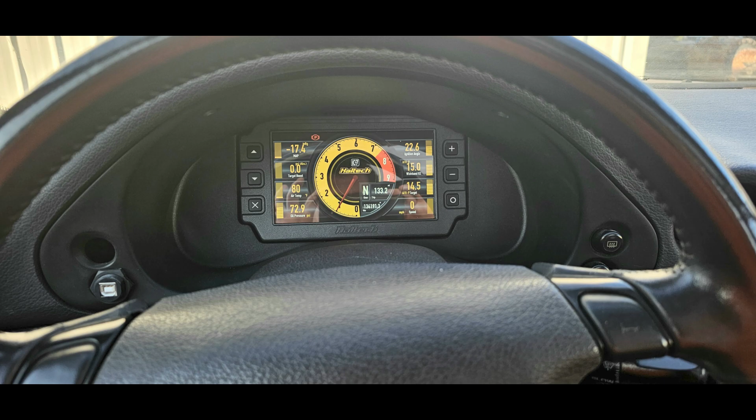So today we're going to talk about two of my favorite features in Haltech NSP. One of them is flex fuel tuning options, and the other is 3D maps. And we're going to see how we can use those together or separately to affect two different methods of running flex fuel in Haltech. So let's say you decide to make the move and you want to go to E85, but you also want at times to run pump 93, and you don't want to drain the tank between your ethanol and your pump 93 octane, right?

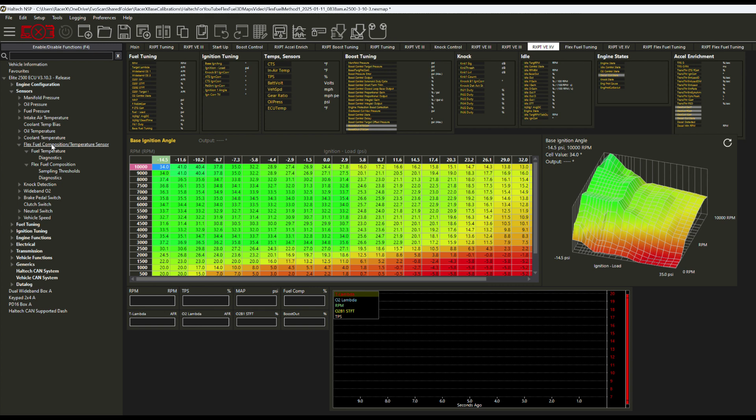So in which case this flex fuel sensor is going to allow you to put whatever you want to have in your gas tank and run on that, and your car will run just fine regardless of what you've got in there. So first thing you're going to do is go under sensors, if you installed your sensor, and find your flex fuel composition temperature sensor, and here you're going to configure it accordingly to whatever wiring you have set up for your sensor, where you've wired it into your Haltech.

So from there, got a couple more things to do. I'm not going to go into too much detail about all of the configuration for a flex fuel sensor, but you're going to want to come in under fuel temperature, under diagnostics, and enable both the temperature raw minimum and the temperature raw maximum. And then under flex fuel composition, you're going to set up your thresholds, right? So enabling your thresholds here, a maximum RPM threshold, a maximum load, and then same thing under your diagnostics, enable each of these. This is going to allow you to provide a little bit of a safety feature in case your flex fuel sensor decides to basically take a crap on you or something similar to that.

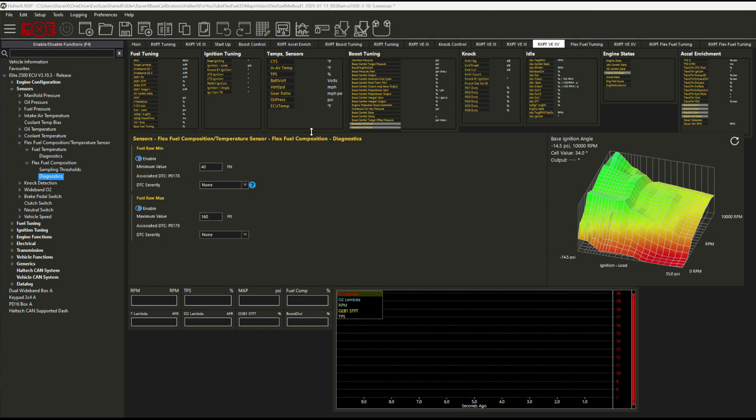In general, it's a good rule to put your flex fuel sensor on the feed line rather than the return line. But if you put it on the return line, then these options allow you to essentially put a clamp on things. So when you're in a high flow fuel rate scenario, what we'll do is keep the readings of the ethanol consistent. So you also have options to set up any DTC severity levels that you might want to, and act accordingly on those if you want to do something with that when it occurs.

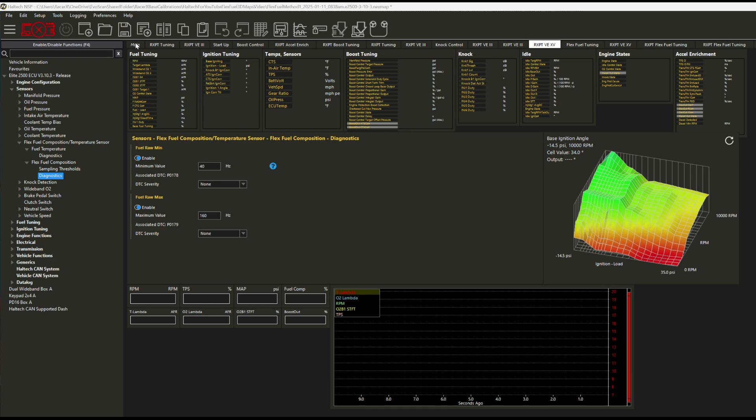So with the sensors set up, let's actually go over here to main, and we can close up the sensors tab. Now we go under fuel tuning. And here under fuel tuning, if you haven't already done so, you definitely want your tuning method to be volumetric efficiency. This is the magic that uses all the math that allows us to tune fuel pretty much one time and not have to tune it again. And generally, if you've got your injector scaling correct, and you've got your dead times correct, and you use a very standard volumetric efficiency fuel map, you're going to be in the ballpark right from the get-go. But anyway, that's a story for another day.

Under fuel type, now you can select flex fuel. Before you might have been on petrol, or you might have been just running ethanol with a specific ethanol percentage. But now you get to choose flex fuel as your option here. And when you do that, the beauty is that this is going to allow Haltech to do the math for lambda based on the stoichiometric ratio, and it's going to provide the proper fuel mass. So whatever percentage of ethanol is in the tank is going to determine the stoichiometric ratio.

Okay, and the last thing we're going to need to do, let's again close up sensors here. We have two corrections that we will need to enable now. So under fuel tuning, we've got our standard corrections here, and we want to add this one. If it's not already enabled, enable fuel compensation correction. And under ignition tuning as well, you've got corrections, and similarly here, you want to also enable fuel compensation correction. This is going to allow us to use that ethanol sensor to make some changes to our fuel and to our ignition based on the ethanol content.

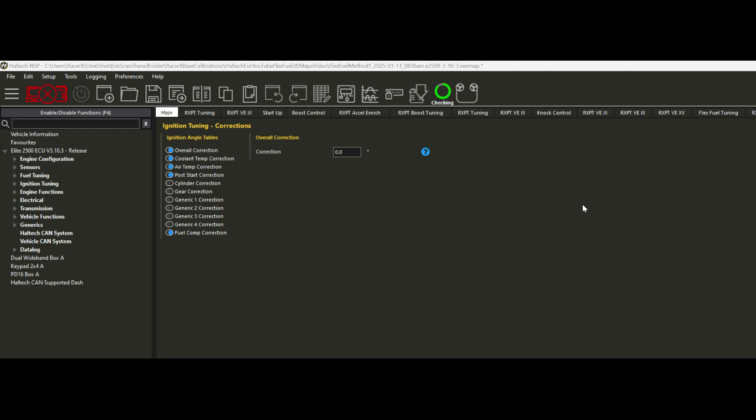So one of the things I just genuinely love about Haltech is its extreme flexibility. So right now we're going to talk about two different methods of tuning flex fuel that you can use in Haltech.

So with the first method, generally the rule of thumb is first you do all of your fuel tuning for your petrol. So you put in your pump 93 octane or whatever have you, and you go about setting up your target lambdas, and you do your base fuel map, which is your VE map. It should be somewhat similar to this. Go and do your fuel tuning, go and do your ignition tuning, go do your boost tuning, do all those things, and then you are done with petrol.

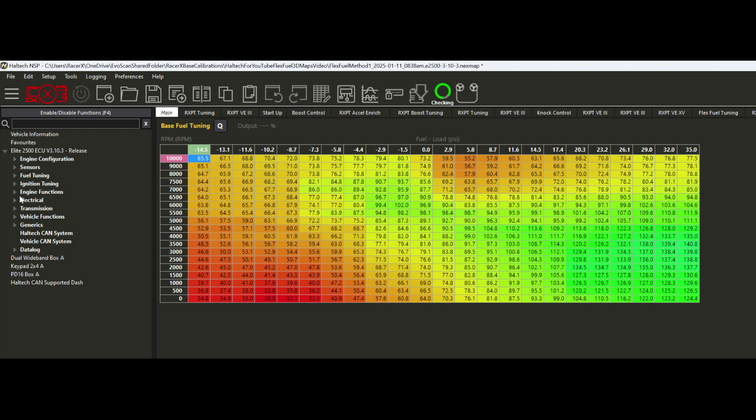So once you're done with your pump 93, now you're ready to kind of change gears and start to use these things called corrections and compensations for the ethanol content. So earlier we were talking about it when we went in under fuel tuning and we looked at corrections and we added this fuel compensation correction. So we look at what that is.

Specifically, you have a fuel compensation correction scaler. This is going to look at the percentage of ethanol that you have in the tank. So the sensor is going to read and say, well, guess what? I've got 85% ethanol, I've got 70% ethanol, or I'm running pump gas, so I have 10% ethanol or less.

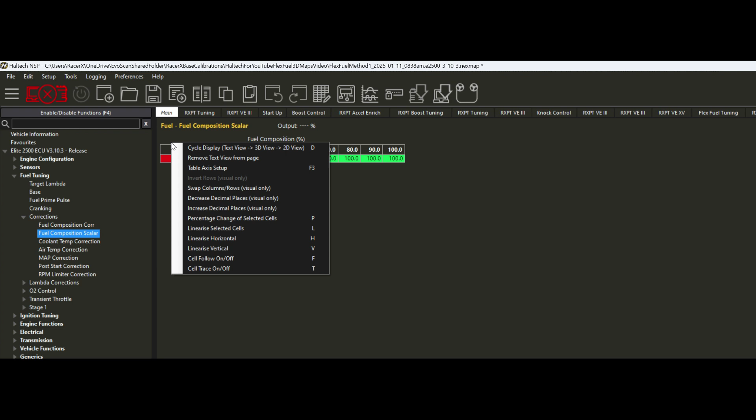This scaler is going to basically use this value to determine how much we will interpolate between the corrections that we're going to apply and the base amount that we already have from our pump 93 tuning. So essentially you want to set this up like this. You can come in here and go to table axis setup. You're going to have values of maybe 0 to 100. This is the ethanol content that you're going to have in the tank.

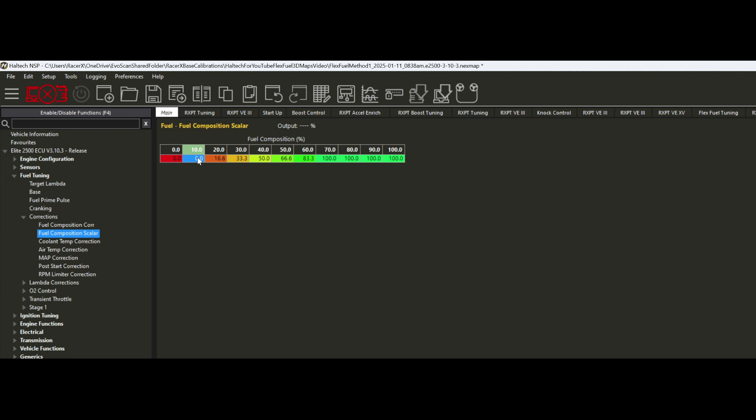Generally, once you're at about 70% ethanol or more, it's going to be about the same. When you're at 10% ethanol or less, that's your pump gas. So basically you set that up like that, close it up, and then when you're at 70% ethanol or greater, you can use 100% of the corrections that we're going to use. And if it's at 10% ethanol or less, the pump 93, then we're going to use 0 of the corrections that we would consider using.

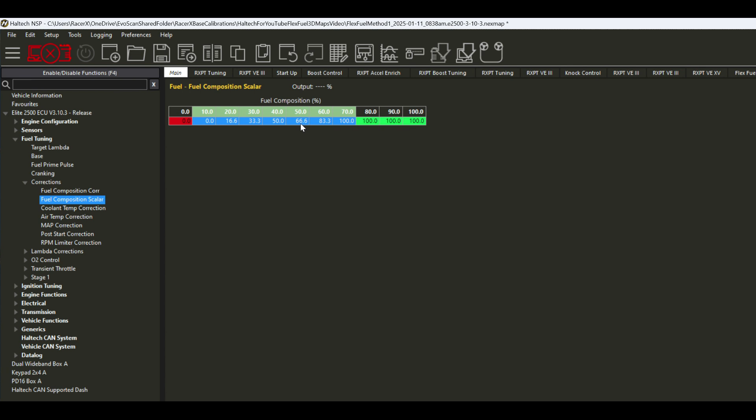So with those values, like we said, 70% ethanol or greater, we'll use 100% of the corrections and compensations, and under 10% or less, we use 0 of those. And in order for the flex fuel sensor to work its magic, when we've got a mixture of pump and E85 in our tank, we basically want to just linearize between these two, and this is going to be the percentage of interpolation that it will use when we work with these correction tables.

So similarly, also down under ignition tuning, you've got another scaler. That's the fuel composition scaler down here. And we're going to set it up the same way. There's really no reason to set these two up differently. But if you had a reason to, you could do your ignition composition corrections differently than your fuel. But nonetheless, you would normally set these both up the same.

Now, here comes the good part. Let's say we've already tuned our ignition timing map, right? We did our timing under our pump 93, and now we only need to make corrections based on what we want to do when we've got 100% of our ethanol request, which is 85% or 70% or better. So down here in the fuel composition correction table for ignition timing, this is where we can add more timing based on how much ethanol we've got.

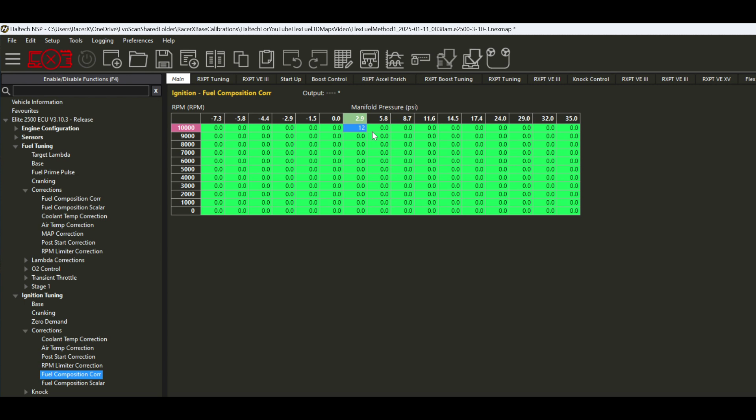So let's say we're running E85 and we feel pretty good about maybe adding 12 degrees more timing at just 2.9 PSI and maybe at 10,000 RPM. We can get away with running 12 more degrees. And then maybe down here at 1,000, we'll put 4 in here. Under higher boost levels, we're going to run less timing at the same RPM, so maybe we'll put 6 there. And then coming down to maybe 1,000 RPM, which theoretically we wouldn't be at 1,000 RPM and 35 PSI, but if we were, let's say we would add 2 degrees of timing.

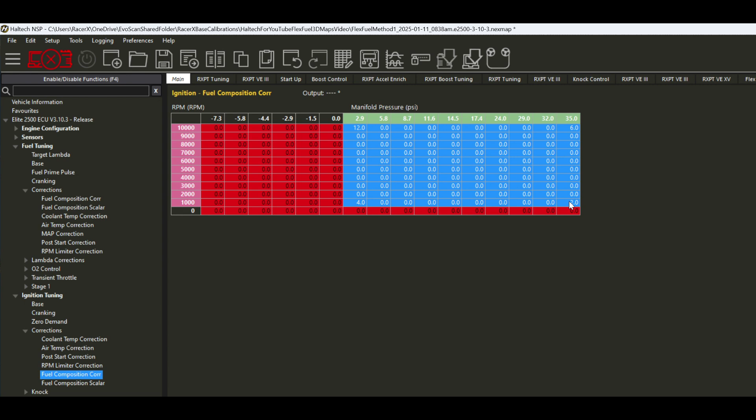So taking these 4 points and just connecting them and doing a little linearization with the letter L, we can see that we can add more timing based on our ethanol content. So let's look at what that means. We'll have to pull these together.

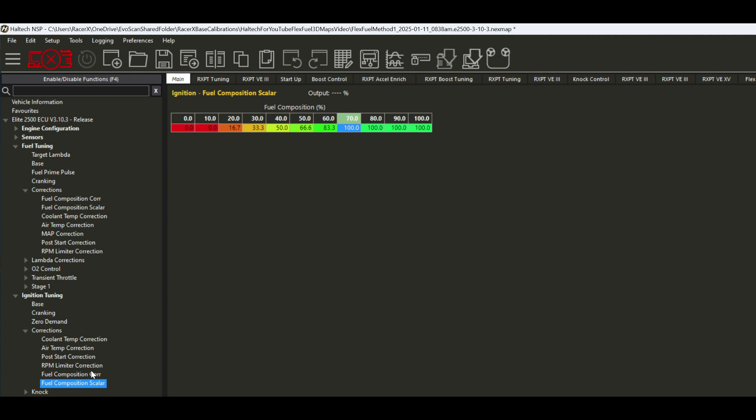When our fuel composition scaler is at 100%, when we've got 70% ethanol or more in the tank, then we will take all of these values. So if we've got 100% or 70% ethanol or better, and we're running 10,000 RPM, we will add 12 degrees on top of what we've already got here in our base table.

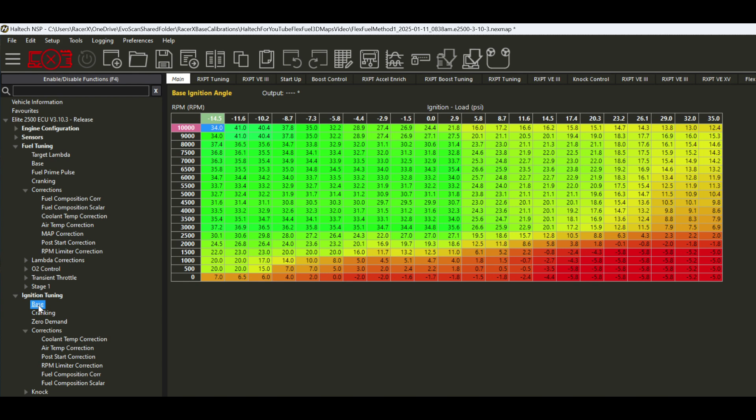Right? So that's how we basically make a quick and easy composition correction based on the ethanol content that allows us to run more timing without really having to go back here and do any mucking around or changing with timing maps or making a secondary timing map, which we would do in traditional systems.

So if we close up the ignition tuning and just come back over here to fuel tuning, again, we have those corrections that we talked about. If we start to look at our fuel composition correction, again, using the same scalar as before. So if we've got 70% ethanol or better, we're going to use 100% of this table. Here is where you can make additions or subtractions to your base fuel map.

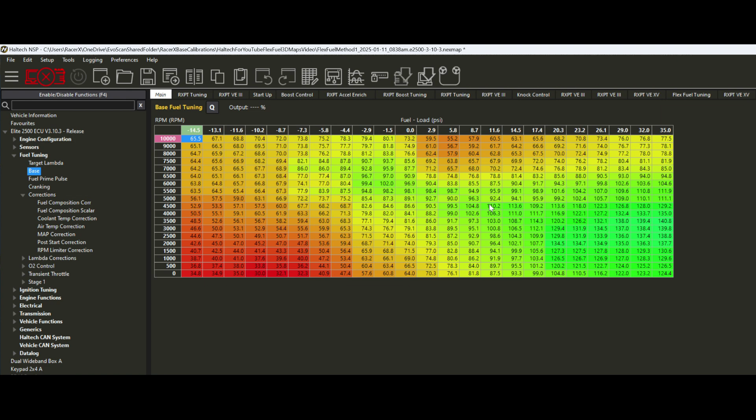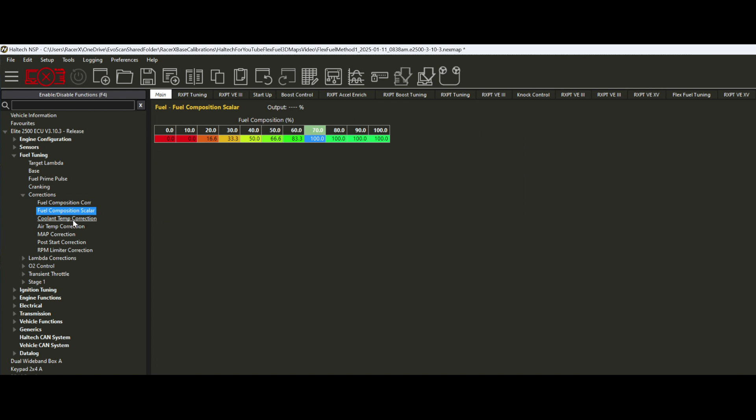Now, theoretically, if our VE table is correct, we really should almost never ever have to make any changes here. So that's the theory. In practice, in real life, if physics doesn't apply to you, which sometimes it doesn't apply to me, you have to go in here and make some changes when you've got 100% of your ethanol content, and it will interpolate based on the percentage of ethanol that's in the tank, more or actually less of this value, on top of your base fuel map.

So if we look at all of these tables together, it kind of works a little bit better. So here you've got your fuel composition scalar for ignition, as we talked about before. These are the changes that we made in that composition correction table. So we'll get an additional 12 degrees of timing when we have 100% of this, or 70% ethanol or better.

If we had maybe 50% ethanol in the tank, then it would roll down. This would probably be about 6 degrees of additional timing. You see how that works. And that's additional timing on top of what's already here in the table. So take that 21.8 degrees that we've already established with our pump 93, add to it another 12, and that's going to be 32 or 33 degrees of timing right there.

Over here on the right side, we've got our VE table for our fuel that we've already done. And again, same composition scalar table. And as I mentioned earlier, you probably would not have to make any changes here. That's the theory, and if physics doesn't apply to you, you might have to make some changes, and you could end up with something like this, so that when you're running all the ethanol that you're anticipating to run, 70% or better, you might have to be removing or adding certain percentages of fuel to stay within your target AFRs. Anyway, all of that together is Haltech's initial way of doing flex fuel tuning.

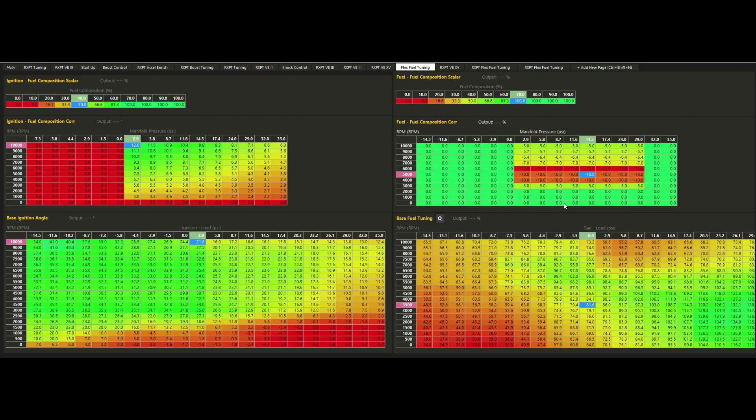So now we're going to stop and take a look at a different way of doing the same thing without necessarily using these composition tables. Now here in method number 2, we're not going to be using any of these composition scalars. They are all set to 0. The composition corrections are all set to 0. Instead, we're going to use a feature that I love in Haltech, and it is called 3D mapping.

So let's say our pump gas tune is done first. And by the way, with method number 2, you can do either your ethanol E85 tuning first and then pump gas. It doesn't matter which direction you want to go. But let's say for pump 93 we had set our target lambda to look kind of like this, with values rolling into the mid-10s as we got into the higher levels of boost for AFR targeting. Okay, now that's great for pump 93.

Now for us to go with E85, we'd definitely want these values to be more into the 11s, because we're going to take advantage of the increased octane level that the ethanol is going to give us. How can we do that? Well, this is the beauty of 3D mapping. So we look here, we've got an X and a Y axis, right?

So on the x-axis, we've got RPM. On the y-axis, we've got boost and vacuum values, and that is typically what you would see in a 2D map. However, if you go in here under table axis setup, click right here, then we've got a third option available. So here we see one of our axes is RPM. All the values are running from 0 up to 10,000 RPM.

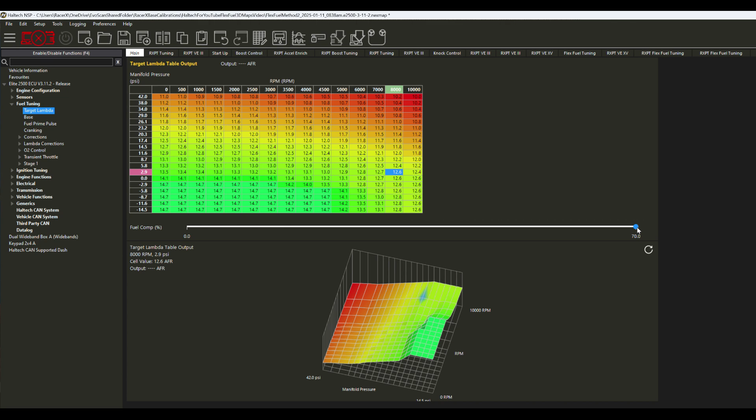So right now we can see that when we're at this 0% of fuel composition, actually I should have made that 10%, we'll see exactly this version of the map. And when we're running 70% ethanol, we click down here, you see the little blue button came all the way down here. We're actually still running the same map, but now we can change it. Let's say we're going to drop in some new values that look more appropriate for running E85.

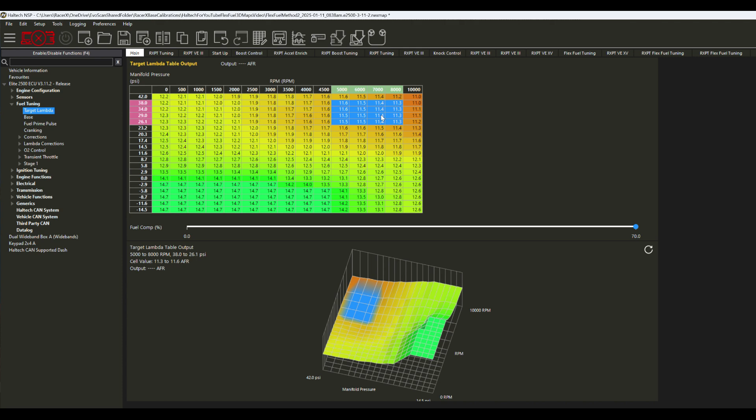So now when we're running 70% ethanol or better, our AFR target's going to be 11.4, 11.3, 11.2, what have you. When we're running just 10% ethanol or less, we're going to be running values that look like this. This is how easy it is to make a change so that whenever your ethanol content is 70%, it'll run this. If it's 10%, it will run this. And if it's somewhere in between, it will interpolate between these two maps.

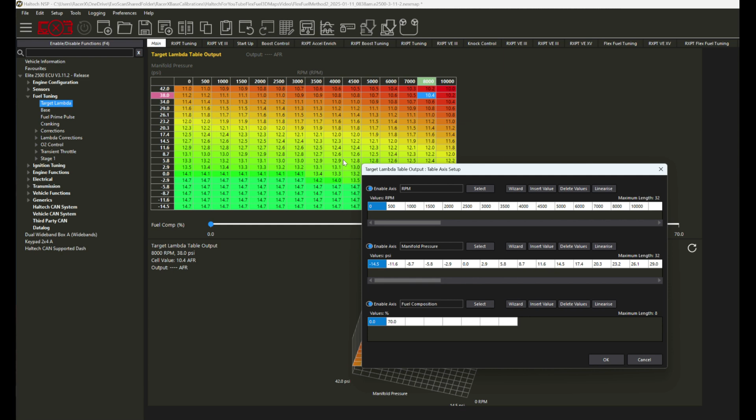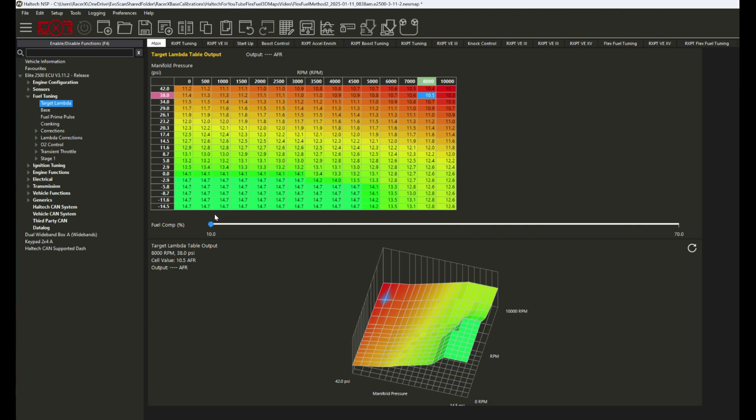So let's quickly go in here and fix this so that we can set that table axis correctly. This should be reading 10 instead of 0. So we can go ahead and delete that value. We'll have 10 and 70. And so now the map works like this. Anything that is 10% ethanol or less will run this sort of pump 93 map, and anything that's 70% or greater will run this sort of E85 targeting map.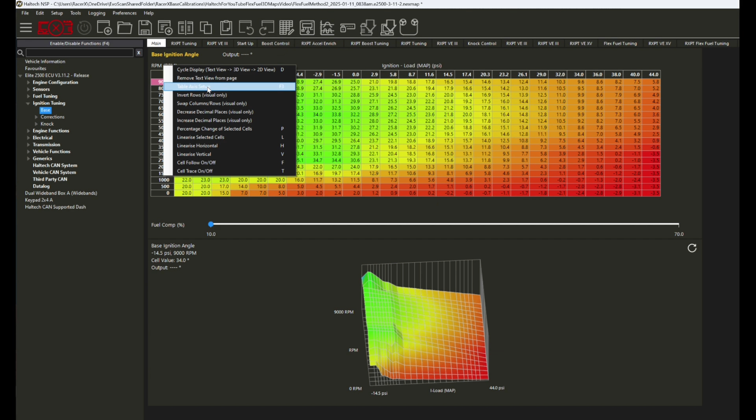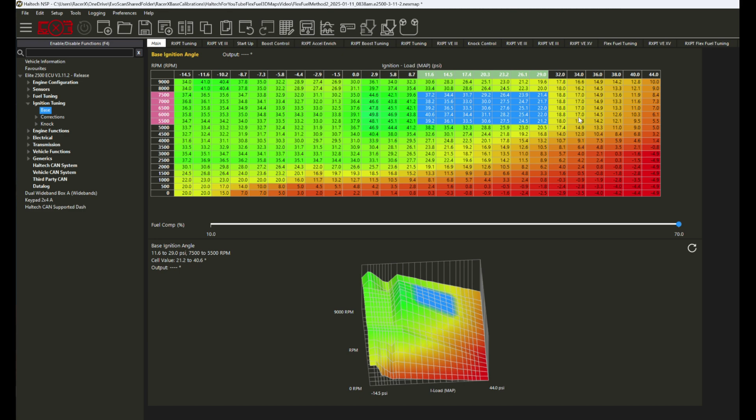So once we're done with fuel, obviously we've got ignition timing. Same thing, we're going to have our base ignition timing table. Once again, we can just go here, set this up by table axis, add that third dimension, the Z dimension of 10 and 70% ethanol. Once that's in there, we have this little feature on the bottom which helps us get to that third dimension. So at 10% ethanol, we're running this kind of timing across this map, and at 70% ethanol, you can see we're running a lot more timing because we were able to tune it with the knock resistance that we get from the E85.

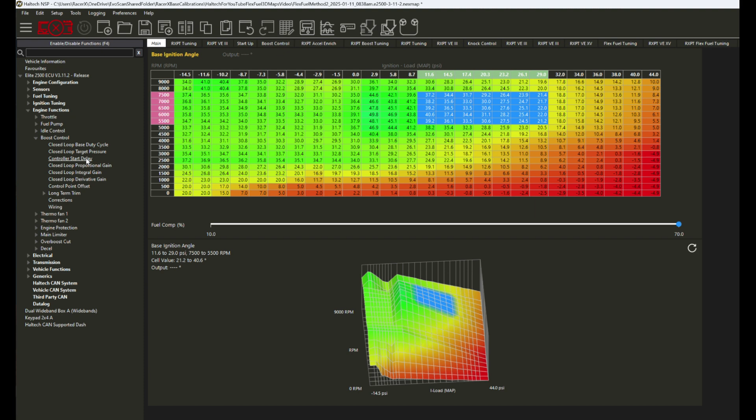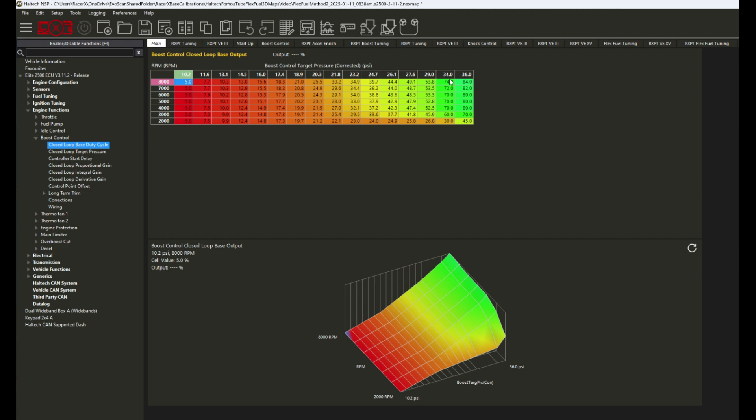Finally, one more table, which is really important. It's our boost table. So engine functions, boost control. We've already done all the open loop boost work, so we set up our base duty cycle table accordingly, so we knew how much duty cycle we need to reach our various boost targets. But the trick here is under closed loop target pressure. Once again, we'll add that third dimension, the fuel composition, and that will allow us to target 2 different kinds of targets for boost pressure.

So when we're running pump 93, maybe our overall target is about 20 psi. We don't want to go beyond that. And if we are running 70% ethanol or better, now we can target 34 psi, and the ECU will just go and get what it needs in terms of these targets. If we're running less than 70% but more than 10% ethanol, it will interpolate between the two. That right there is pretty much how it's done. So 2 different ways of tuning flex fuel. Choose which method makes the most sense for you. That's the beauty of Haltech.